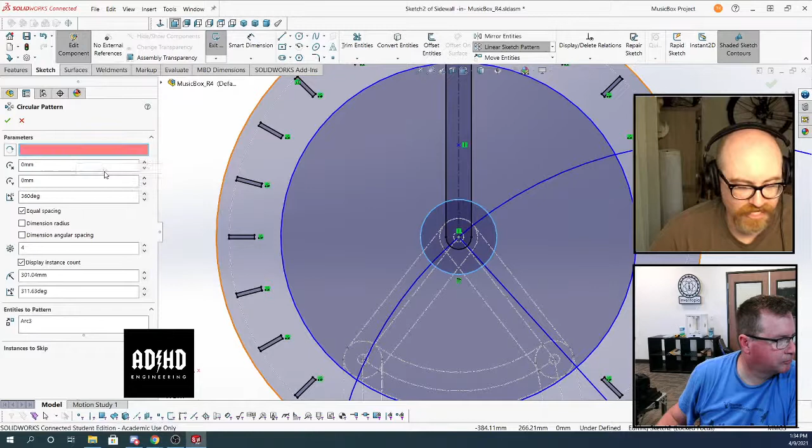And again, there are situations where if you're making a bookshelf, you don't have to think about this stuff. Just make your bookshelf, have a bunch of contours and call it a day. But you're talking about a lot of interdependent mechanical things with a lot of different features that overlap.

For me, this is actually a perfect example of how not to do it. But I thought I was being efficient and keeping my timeline clean, making sure that if I wanted to change one thing, one feature would always depend on the other. So if I changed one diameter, let's say if I wanted to change the number of spokes or the inner diameter hole, I would have the ability to edit all those things together.

Well, you can, first of all, with global variables, but second with just doing it in the proper order.

What the hell is happening to me here? I'm trying to make this slot patterned around this thing.

We can't see anything because you're not streaming anything. Oh, I'm not streaming in Discord anymore. I'm back on YouTube.

Well, there's a crazy latency in YouTube. Yeah, I won't see what you're doing.

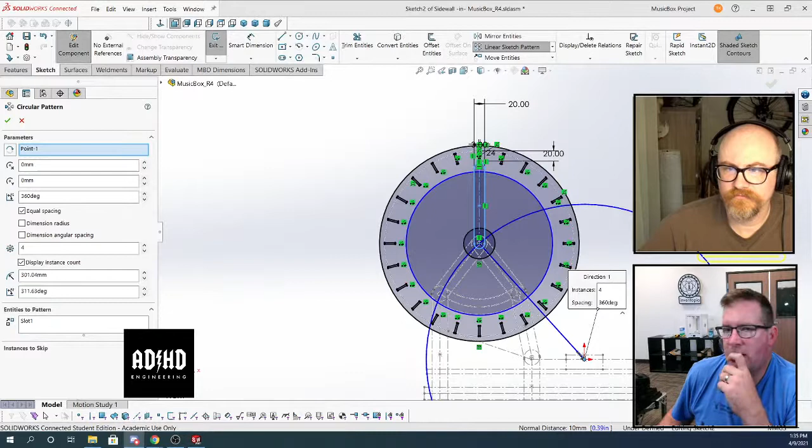Sometimes it works, sometimes it doesn't. I don't know why. But I cannot get it to center this where I want it, when I click on the center point.

So first of all, you definitely want to select your feature first, the entity you want to pattern. Don't go to parameters because that is actually backwards, it should not be at the top. So it defaults to revolving it around the origin.

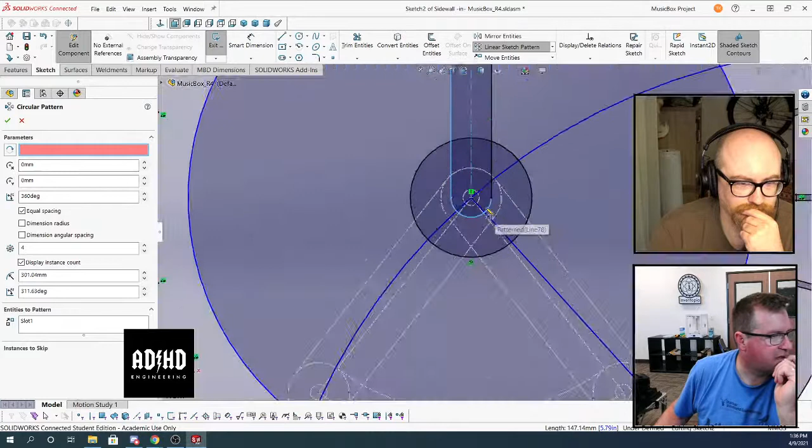Right? Now if I want to change that, I delete the origin as the point, and it doesn't do it. If I select that circle edge, it goes back to... look below it, you think you are...

He was saying that it's intersecting geometry, but the other part... No, you didn't rotate the feature. Like I learned it in uni, you make the feature and then you make a pattern out of the feature, not in the sketch.

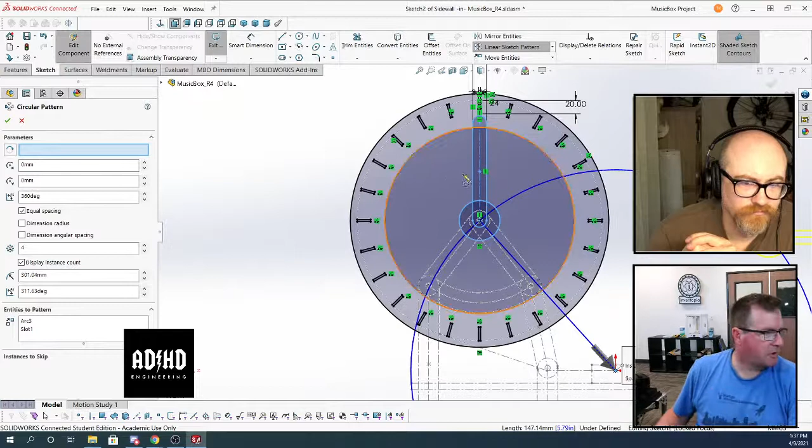Yes, you can do that. But if you have intersecting geometry, I think it makes problems.

All right, you bastards, I'm going to do it your way. Wait, I wasn't even... you have a good eye because I wasn't even watching. He was absolutely right, you were patterning a sketch entity, not a feature, which is interesting.

I was trying to pattern the slot. The sketch, yeah.

So all right, we have this. We have the side plane. Now we're going to put a new sketch on that guy.

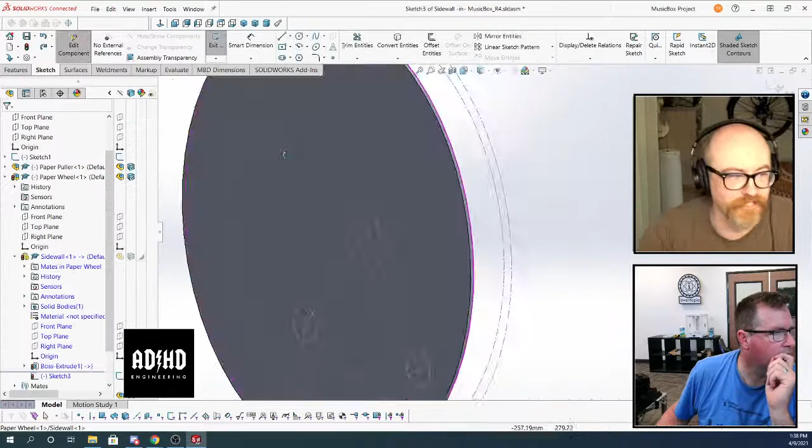We're going to convert. Oh, so your heart was in the right place. I get it. You were going to pattern slot as a cut feature instead of the sketch extrude. I actually agree with that, and I appreciate you were actually following through with what I was saying. But you had already patterned the sketch feature, though. I had already patterned one sketch feature. I was trying to pattern another sketch feature, and it worked the first time, and I don't know why it didn't work the second time.

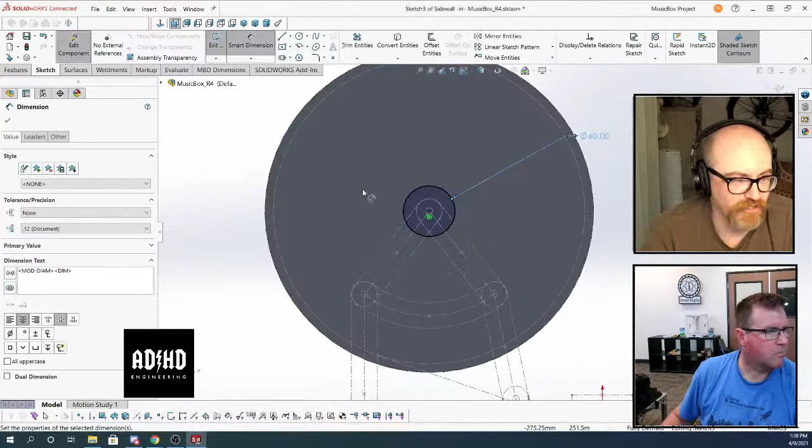Yeah, I don't know what the heck happened there. By the way, Mate, to his point, that's kind of what I meant for him. Like when he's talking about extruding all of those squares, it's for the same reason that you don't want to extrude a gear, by patterning the tooth all the way around and then extruding what's left as a contour. It's better to cut one tooth and pattern that all the way around. That way there's just less information to process. And so that's kind of the point I was trying to make.

No, for sure. Actually, to be honest, that specific example you were talking about earlier, I agree. I do think that anything that is patterned around a circle many, many times should probably just be a feature, especially from how you can change it in the future. If you pattern a sketch object, then say you want to make it a triangle instead of a rectangle, now you've got to redo the whole thing. Whereas if you patterned an extrude, you just have to change the extrude profile, and you're good.

Right. You know what? So I can't get away from this because actually I'm trying to define. I'm drawing this based on the spoke, not the cut, right?

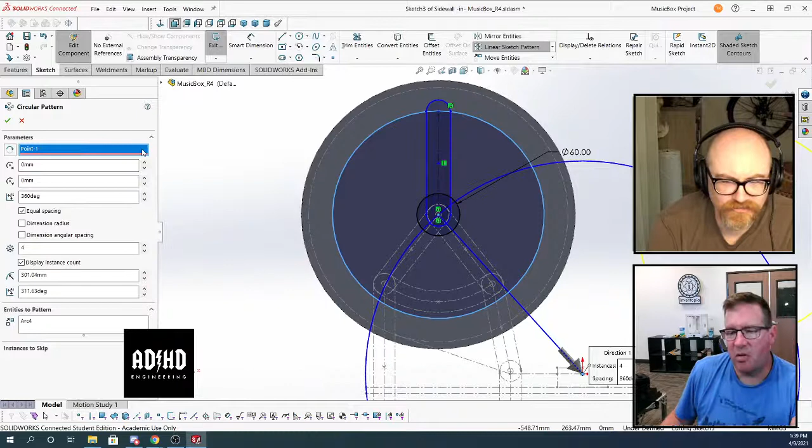So if I wanted to make a 5-spoke thing, what are you exactly doing? Just trying to make the spokes on the wheel. Okay, right? And I was going to define it based on this slot entity, right? So that's one of the spokes, and I was going to pattern that around.

I can't make a cut here and then pattern that cut. I would actually have to draw the other part of the hole that I'm trying to cut, which is a little weird. Oh, so that's how I would do it. You draw the cut out and then pattern that. Yeah, it's just not the way I'm thinking.

Equal slots. I love the equal slots constraint. Yeah, I mean, I like it too.

All right, and this is going to be 360 divided by 5, which is 72. Features. Now, I couldn't do all the individual cuts that are going to be for the cross braces because there's a different number of those than there are of everything else.

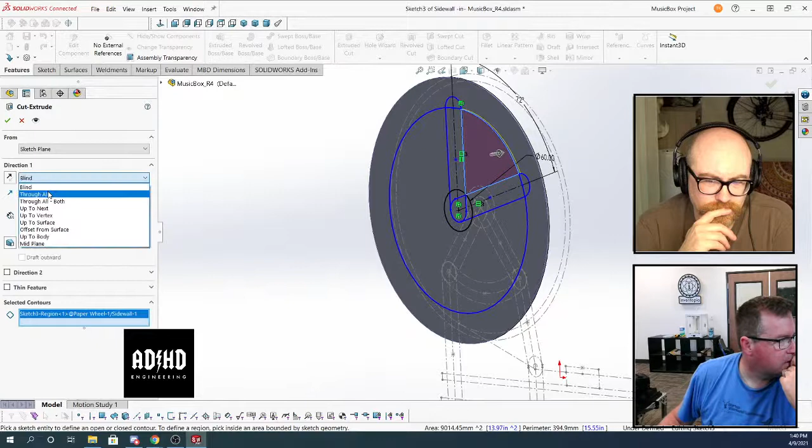Roll. Huh. All right, so now you're going to have me. Where the hell is that now? It's under linear pattern, you just do the down caret. Direction. Yeah, don't stop, back up. Don't do the direction first. Pick the feature. Oh wait, no, you did, you got the feature picked. No, so never mind, you're good. Sorry, you want to do the feature first if it doesn't populate it, but you did, so don't worry about it.

72. Wait, what? You want to go around 360 degrees, don't you? Yeah, so you leave that at 360, and then you just put the number of instances. There we go, there you go.

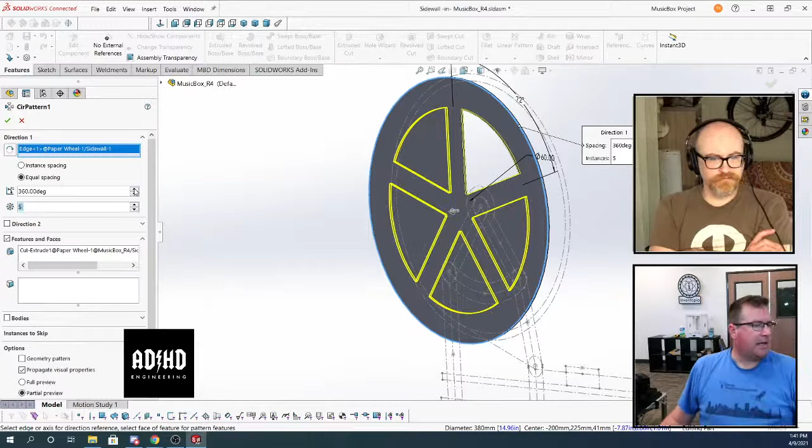Yikes, I don't know, guys. That's harder, that's harder. I mean, how is it? I don't know, I just like doing everything in one sketch because then I only have to edit that one sketch, it just seems like.

By the way, this whole feature, this flyout thing, I miss this in Fusion right now, where you can automatically grab all of those fillets. Well, so if you go to FilletXpert, it's even more powerful. But I mean, this does work too.

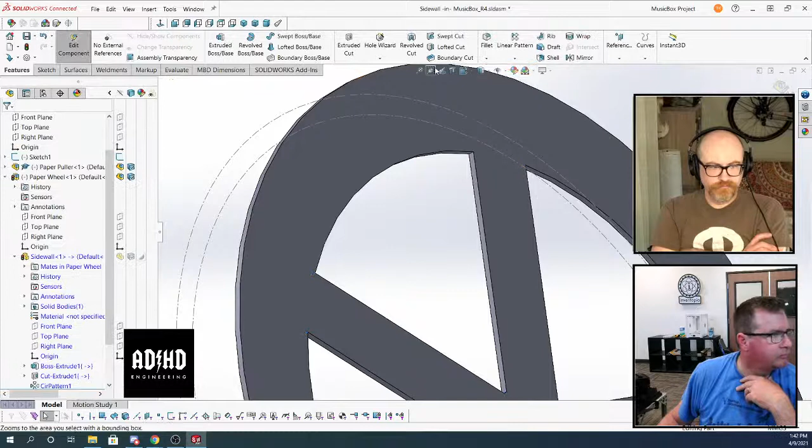It's not letting me do it. Okay, you see how there's a fillet under the command? There's FilletXpert. That should... I would say there should be a selection for all concave.

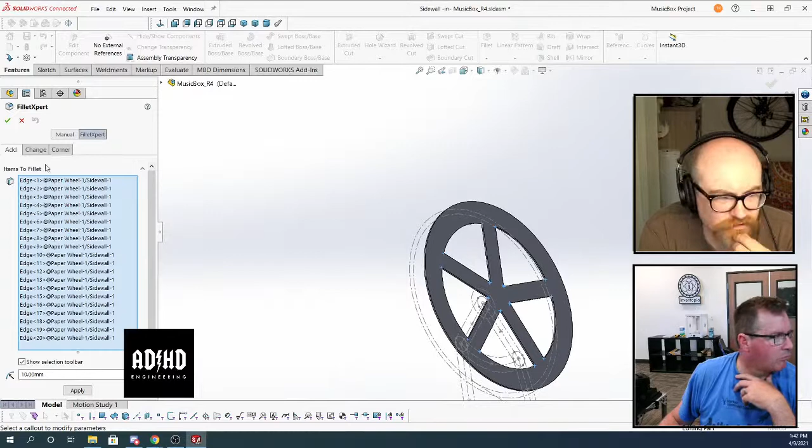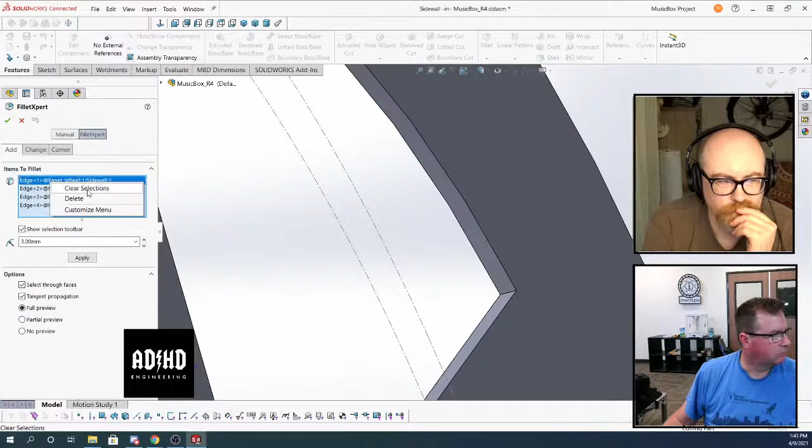I think the problem with it not doing 10 millimeter radii is that it would self-intersect. Oh, the fillet was too big. The thickness of the part is probably less than 10 millimeters, or less than double the radii, so that creates self-intersecting geometry which it can't calculate.

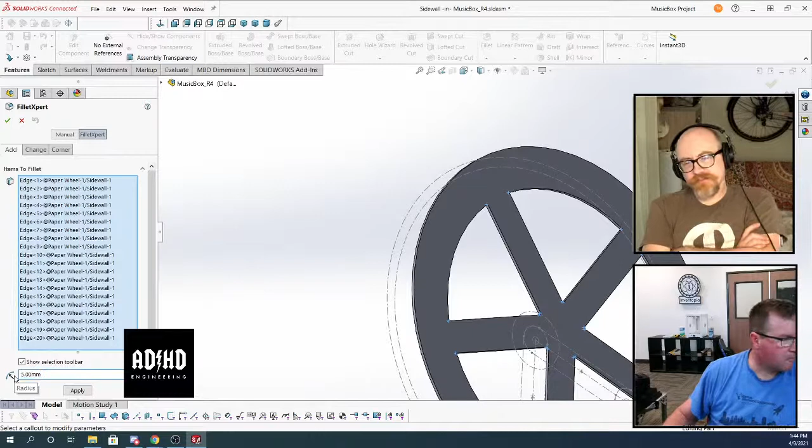So it won't allow you to do 3 because your corner, you made some... If you really want to know the real reason why this won't work, look at the corner on the inside by the hub. You'll see you actually have two edges there, not just one. So you have to make your feature look different than that before you try to fillet it.

Which is another, so something like that.

Am I still editing this part? No, I'm not.

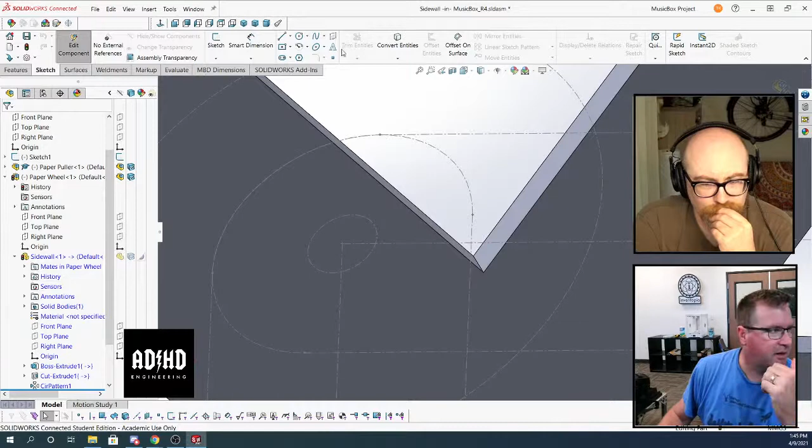This is a cool thing I love about SolidWorks: in Fusion you could do that edit and get timeline instances that end up in a different part. If you don't select the active part, you can do sketches in a different part, a different body, and they're not related. You could put a sketch for one part in a different part.

Right, let's do 12 or 15. That looks better.

All right, now I'm going to do another sketch because you guys want me to do it this way. You bastards.

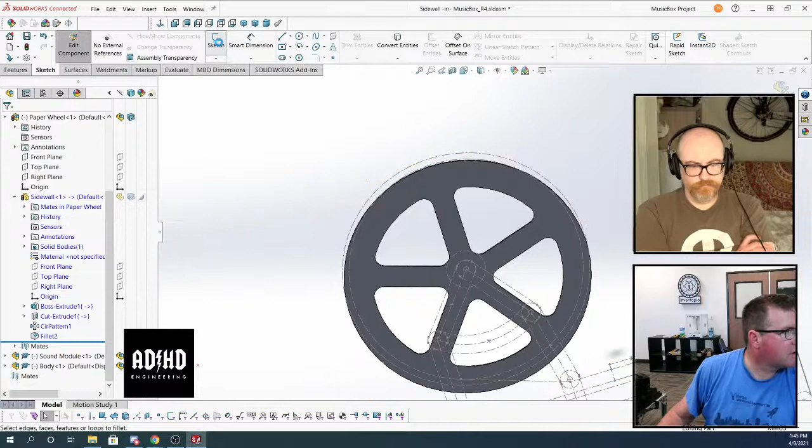And I'm going to... 3.1 millimeters. This is going to be plywood going across. And we'll do 20 millimeters there.

Is there a reason you have a construction line there? It's just to keep the center of it vertical to this thing.

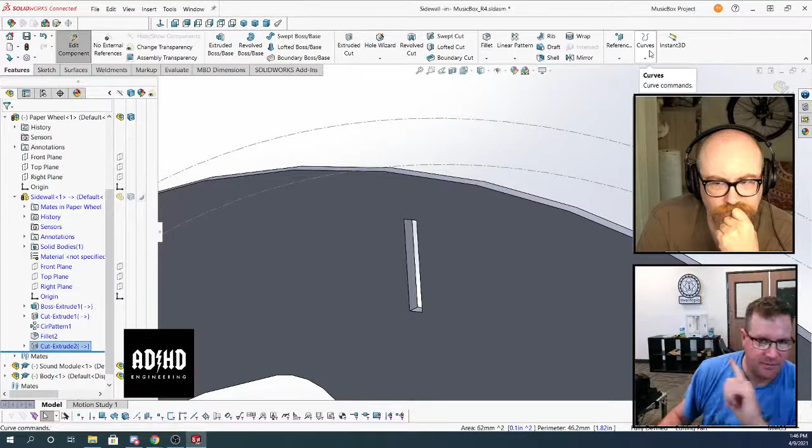I'll draw a construction line up here and then do a center point rectangle up here. You could just make the center point of the rectangle vertical to the center point of the circle. Yes, I could, but you made me make an entirely different sketch just for this feature, so it's not getting overly complicated now, is it?

I'm going to do 24 of those.

See how easy that was? Yeah, but look at my timeline, man. I could have had one sketch, albeit a busy one, and one extrude, with all these patterns hidden in that original sketch. I'm doing it this way because that's how you told me to do it. I'm not saying I like it.

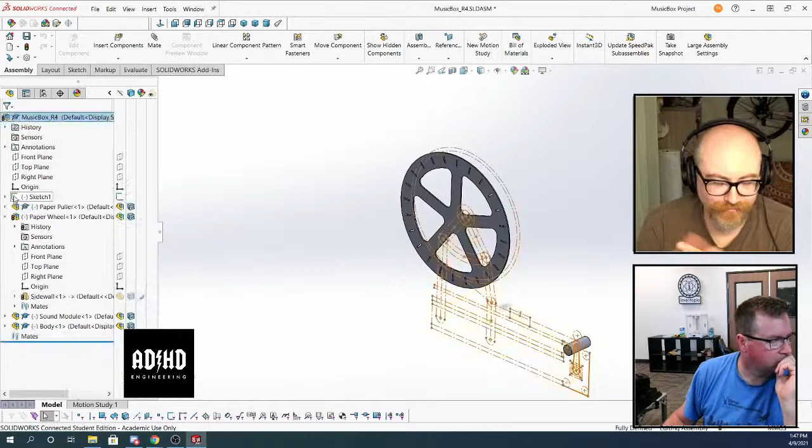I get it, the folklore of Fusion says that's what you should do, but that just does not apply to real modeling, especially in SolidWorks. That's just not how things are done.

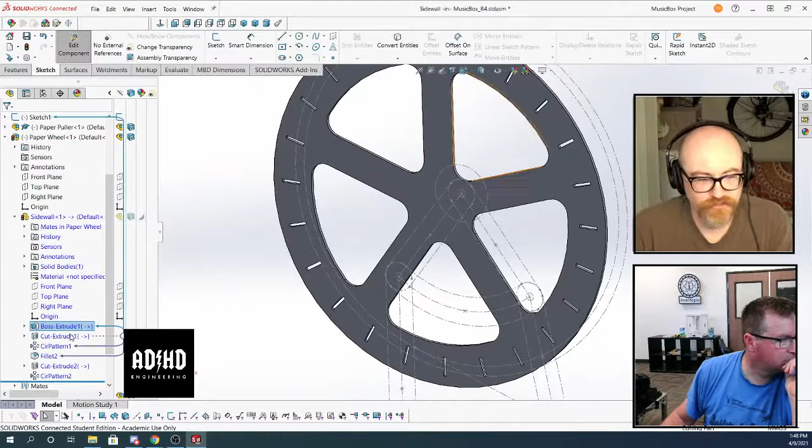You want all of those things to be separately editable. And the neat thing is, if you select that solid, it should display all of the things about it - for example, you can tell SolidWorks when you select a solid to display its dimensions, how many things there are in a pattern, etc. That way you can change it without even going into the part - just select it and change the number that appears on the screen. It's kind of neat.

Alan, I'll be done at 2:30. Okay, thanks. Someone, to be polite and not interrupt my live stream, was standing right next to me and texted me instead. Thank you, Alan.

Hey Alan, as a punishment, come here. Sure, you have to be punished. No problem. All right, this is Alan Perlstein.

Hi everyone, tell him what you do. We are reinventing cocoa by growing it from cells. Cocoa is unsustainable - there's slavery involved, and a whole bunch of little kids growing about 60% of the world's cocoa. So we have a better way to grow it, better and healthier for you and the world. Love to share California Cultured, please reach out. Thank you, sir.

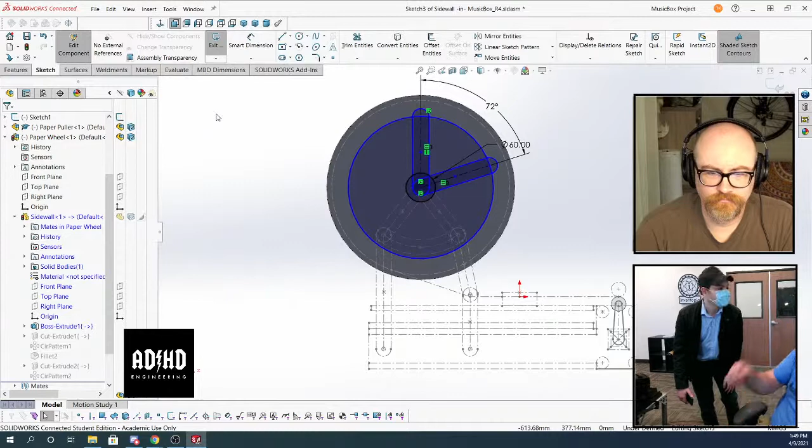All right, that's my standard punishment for someone. No problem, anytime, you got to do your elevator pitch. So yeah, just like Impossible Burger created burger in a test tube, they're doing chocolate in a test tube, which is good because it's not meat - it's plants growing it anyway. A lot of the world's cocoa is made using slave child labor, so he's helping solve that. Those are the kind of people I spend most of my week with.

So his punishment was publicity? His punishment was publicity? It's not that much of a punishment.

I know, blue lines. Okay, I need to do this cut extrude.

Yeah, I would trim the hell out of that sketch personally. I'm this close to cutting you off, David. Just this close.

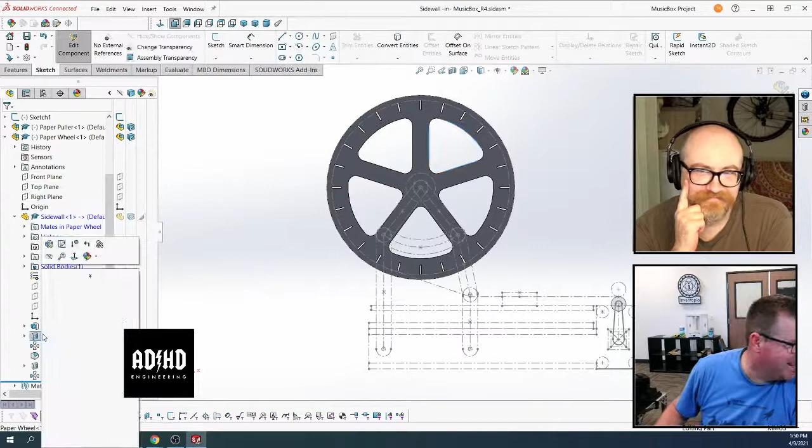I'm still trying to figure out how to get this part to not... oh, I'm gonna do this here. I'm gonna cut this too. I would too, cut the hell out of that.

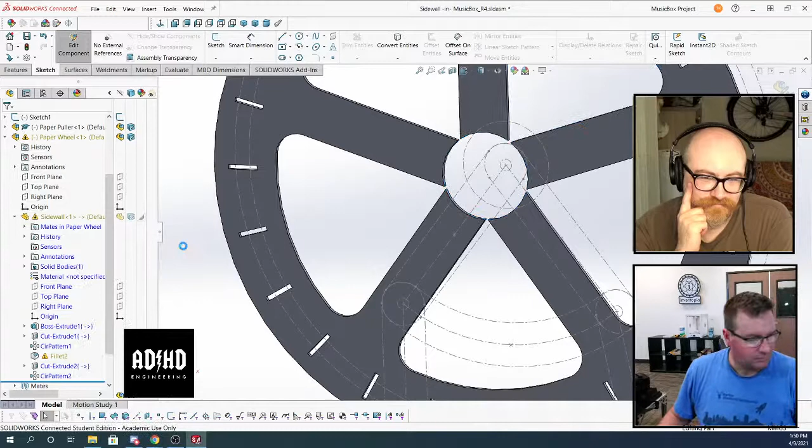Like at uni we learned, yes, you have that cut feature, and that's how I learned to cut in the context of learning. You create all of these solids, and then you can more easily see what you could do if you would try to manufacture that part. You would say, like, I have that piece, I bring it to that geometry, then I cut something here, and in that way it's easier to wrap your head around, compared to having one big sketch which tells you everything.

Right, yeah, that's a good way of putting it, man. Thank you for the input. I agree. And that's kind of... I don't, but thank you for the input anyway.

I like my one sketch parts, man. Well, I don't. Yeah, all right, so again, I'm doing it your way, you bastards.

That said, all of this was built up, so now I have in this file, because I want to see what it's like, this exercise is for the sake of playing with the bookmarks and the labeling conventions and making it right. So I'm going to hit File, Save with Options, and hopefully I'll be able to save multiple parts across multiple assemblies, all with different bookmarks, and it's not going to be a pain in the butt.

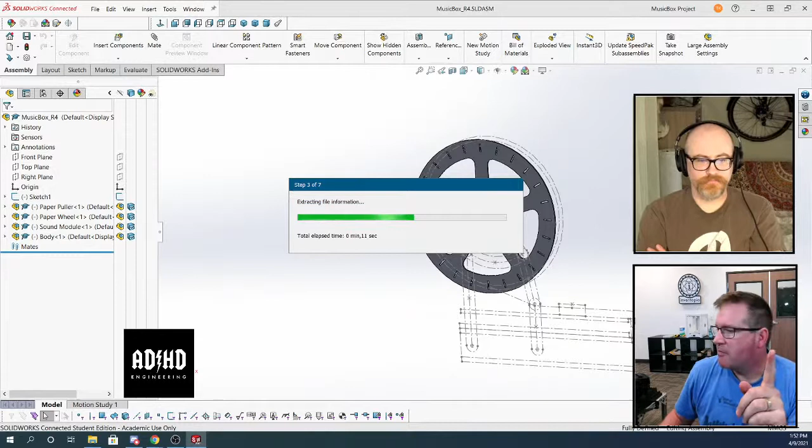We don't know that it's not going to be a pain in the butt. Yeah, what Nicholas is saying in the chat.

I don't know, I like doing it in the slots. What? Yeah, he's saying if you modify the number of slots, it's harder if you only have one sketch. I don't think it's hard, even. You just go into the sketch and you edit the pattern in that sketch.

But yeah, I don't even see a chat in YouTube. There's no... But you need to find the pattern in the sketch, and if you make your sketch needlessly complicated, it is hard to find it. Exactly, that's the point probably that he tries to make.

Of course I can find everything, but do I really take shorter time if I try to find it, or just know where it is? If you look at the part and you don't know it, you have to look at the sketch to try to see where's the pattern, if you do it all in one sketch.

I mean, so that is absolutely a good enough reason, right, to do features in patterns outside of a single sketch. I agree. But it seems like the real problem here is the culture around the Fusion project, Tim is showing it here, is about trying to cram as much as possible in one sketch as the objective, right? And were we doing that to keep the feature tree compact and make it editable and navigable, or were we doing it that way because of the weirdness of Fusion and the way it stacks stuff, and because the timeline is sometimes not that reliable?

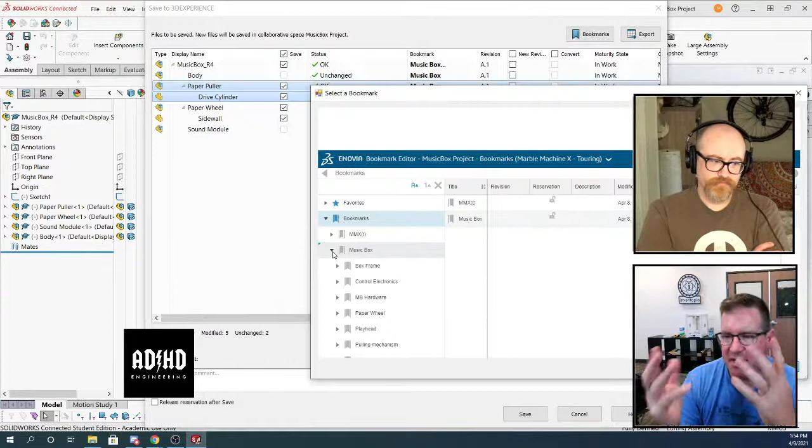Again, there's a lot of folklore around Fusion 360 and how it works. And it has unfortunately driven a lot of very poor decision making to try to work around those misunderstandings about how Fusion works. A single sketch with a feature, then another sketch with a cut, and a pattern, is as low or lower of a processor load than having one sketch with 800 sketch profiles that you have to individually click to get the right extrude. It's sort of like you're trying to fix something that wasn't a problem to begin with, right?

Well, by making it harder. I mean, I do know that if you're going to go back and change like the rectangle that I just patterned around to a circle, you would really be deleting the pattern and then remaking it, rather than just editing one instance of it.

I do get that, but if I have to disabuse myself of that notion, we do that, right? But you do admit that for the Fusion project, we've been telling people to put as much information into one sketch as possible. I know that was a problem from the absolute beginning. It should have never been a part of the CAD standards. You're saying not even for Fusion? No. It's even worse for Fusion, actually.

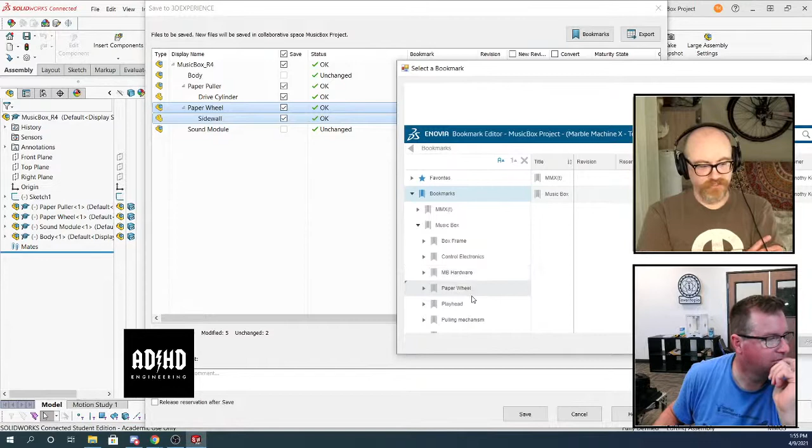If you look at the box frame, I don't know what it looks like now, but the one that I did, there's a single sketch for each of the little weld-on bits, and the sketch is on one of the origin planes, and the extrude was done using an offset in the right place, so that if I need to edit it, I know exactly where it is in which sketch. All of the extrude information and where it is is right there, editable, etc.

And the problem is that I noticed once I left, people were putting planes in wacky places to try to sketch on it. And then once they put a plane in that place, they would do this million contour sketch that included a panacea of sketch contours for 100 different bodies.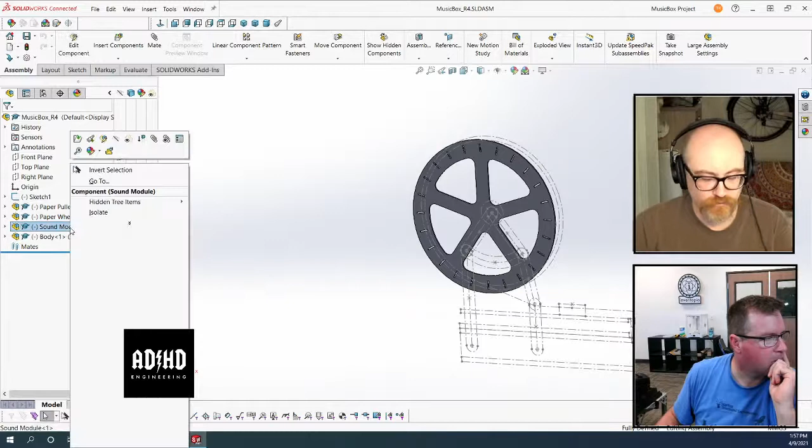And then they think they're cleaning up the timeline by having just one sketch and a plane, but really you're making the process harder on yourself, first of all, because the reason you do this in the first place is because you want it to be a thing. But second, that feature should only have to extrude a sketch. If you have to go in and say, okay, I want this contour, I want that contour, I don't want this contour, then you've totally missed the point of the extrude feature to begin with.

Right, because if you have this sketch profile with like 50 holes in it, you're like, okay, I don't want this hole, I do want that hole. Again, what you really want to do is extrude your primitive, like a circle, a square, whatever it is. You extrude that, then you sketch a location, then you go in and say, okay, how many 5mm holes are there? There's like 50 of them, and they're all in weird places. So in that sketch, or maybe a second sketch, you can put points where those holes are located, and then you can use the hole feature.

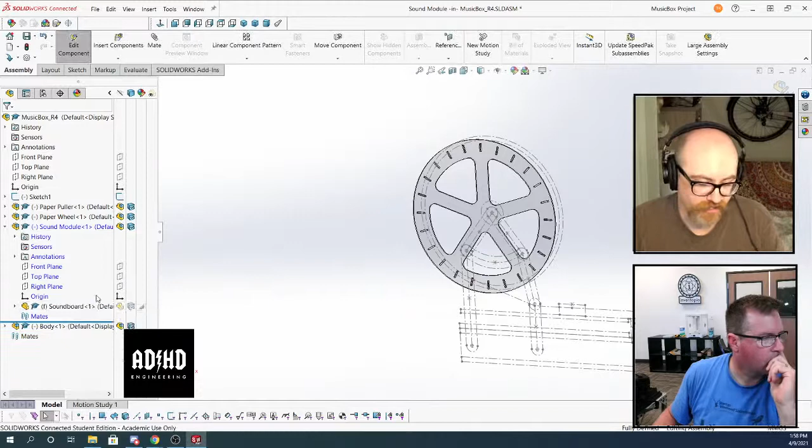And now you've got a primitive extrude with a hole feature. And if those holes are in a circular pattern or a square pattern or whatever, now you can say, okay, the first one, the seed, is going to be at a location I've determined. I know what the pattern is. So that sketch, all it needs is a location for the first hole. And then you just pop a hole there, and pattern the hole. Now you've got 3 features and maybe 1 or 2 sketches.

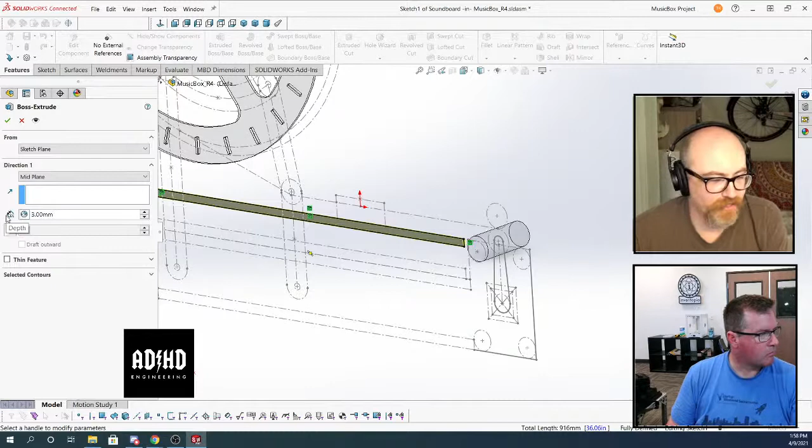Right, but what you have is a recordable set of instructions to the computer, and frankly, even more so to the next person that has to work on it, because they know your design intent. That's an even bigger deal, because now you've got a thing that says, okay, it's a circle, it has a bunch of slots, and those slots are patterned in such a way, and it's instantly something you can tell by looking at the feature tree or the timeline. So having one sketch with 1,000 sketch contours that you then have to spend half an hour selecting is just bad practice. It's not how the real world would work.

I am seeing in the comment here, so Amos—who's, do you know who Amos is? Of course I do. In fact, I just—so he says best practice is simple sketches, and I trust him, so I'm just going to go there. Not to say I don't trust you, David. I'm just saying he does this for a living.

That's kind of, I don't know.

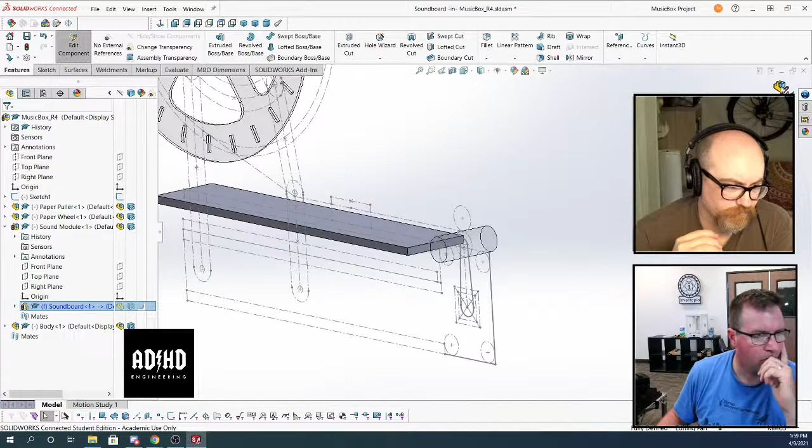I do have a counterpoint, and this will be an interesting example, David, because one of the best examples as to why you might want to put everything in one sketch is what you did, Ben, with the triggers. I'm actually curious, when you made that in SolidWorks, how did you make it? It wasn't just one sketch, right? It was, well, yeah, but that thing is a single piece of steel with like 12 holes in it.

Yeah, but all those holes are, first of all, unique. They're not patterned, that's not a patterned sketch. They depend on, what do you call it, they not only contribute to the overall shape of the thing, but they also depend on the shape of the thing. So they're not features in the same way that spokes of a wheel or slots patterned around a circle are.

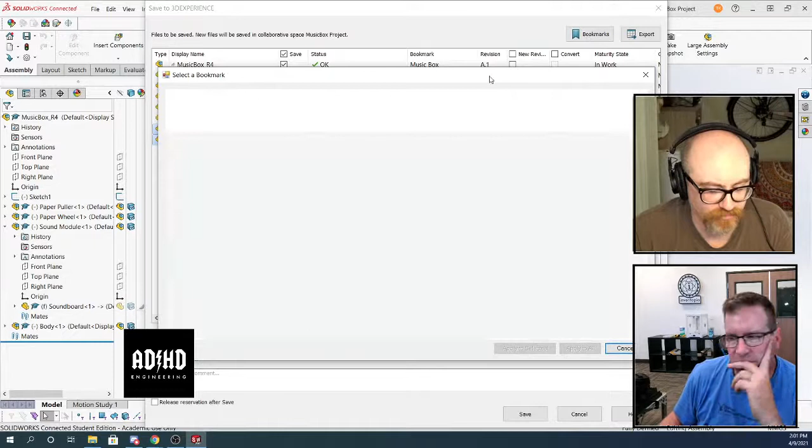I think I get what you're trying to get at, and in a way you're counterpointing using my own example. But on the other hand, it's the best example I could think of, honestly. Yeah, I get it, none of those holes are patterned and they're all unique, so it doesn't really apply to that particular example, unfortunately. Right, well, okay, so that brings me to the next point.

By the way, Amos is in the Discord room. If you have opinions, feel free to unmute yourself and speak up, man, we can use your expertise. You don't have to, if you're currently in a sawmill and can't speak without noise, I understand. Invitation. Yep.

One of the things I noticed working on the MMX is that there are plenty of things that are repeated or should be patterned, and I agree with you there. But there's also a million things that aren't. In those cases, I think it's better to put them all in one sketch. There are so many examples of parts on the MMX where they're all in one sketch, and the sketch is better for it, even though they are holes, because so many things on the MMX aren't patterns and shouldn't be.

Can you give me an example? I'd say the entirety of the side frame. I can't imagine anything that should be repeated on that, and it's got a ton of holes and different things in it, but nothing there should be patterned. You could put everything in one sketch, which is what Andre did, and it works really well.

Wait, the entirety of the side frame, what do you mean? Right, I'm not going insane here. Yeah, the side frame for, hey—

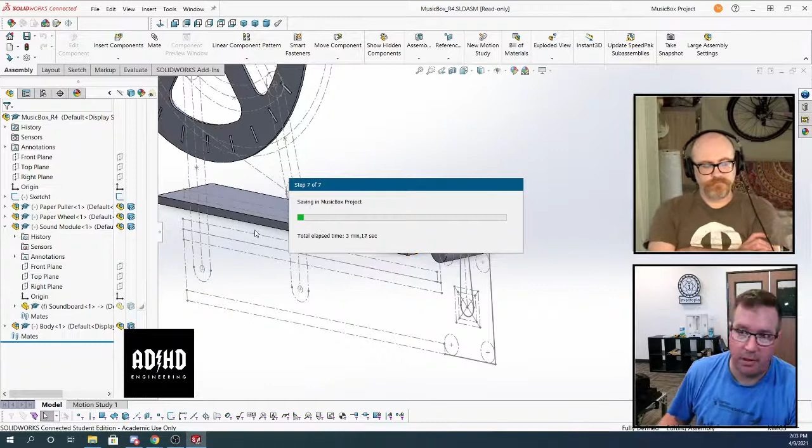Cool, so I now have 3 subassemblies. Well, I made 4 subassemblies, but I've made 3 different parts. We're editing everything together, and as long as you drill down in this side thing and edit your parts, I think you don't break it.

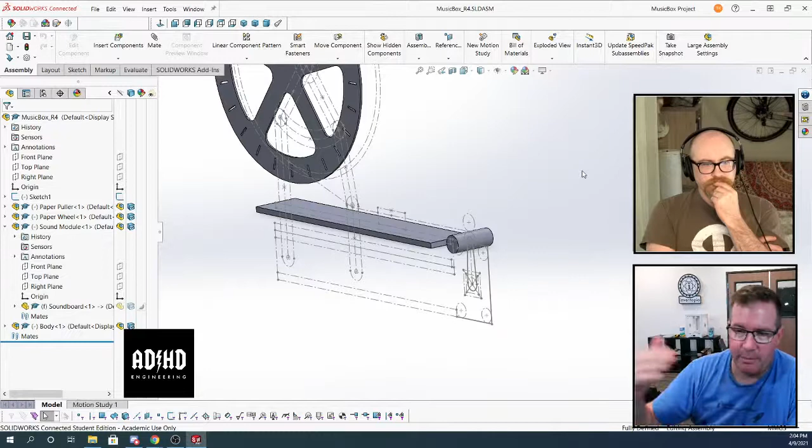So I'm doing a very similar thing in a Fusion project right now, and it's a pain in the butt because in Fusion you can only edit in place one tier down. So if you have subassemblies, you have to open up the subassembly and then edit in place, or go somewhere else and then update. It's a real pain in the butt when you have subassemblies to edit in Fusion.

So back to what Mate was saying, you can just say Matt. It'll be better. Matt. Mate. Okay, yeah, it's actually just Mate. I've never... is it like it's not Matthew?

It's based on the tragic story of how I accidentally misspelled my name when getting it engraved on a ring because I was too tired. When I went in to be like, 'Hey, you spelled my name wrong,' they were like, 'No, that's what you put in the form.' So now I keep it. I have a good friend who misspelled his name in my fraternity - he didn't have the N fully closed when he wrote it down, so instead of Logan it was Logar, and it ended up on our chapter composite as Logar, and he's been Logar ever since - that was like 20 years ago. So it's exactly that for me.

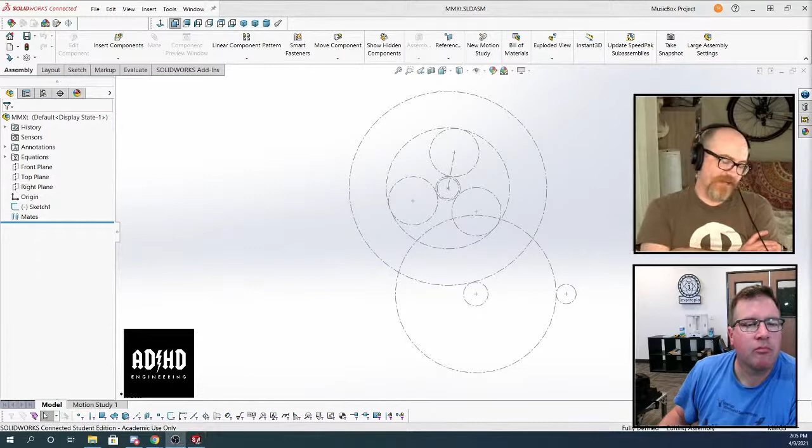All right, okay, well, so Matt, I actually disagree about the side frames. I think the side frames - there's a reason that the skeleton has the outline of them - and you should use a combination of offsets and trimming so that there's a single sketch profile for each one of those.

I actually think that the side frames is a good example of bad modeling. Really? Wow, that's so we're just in direct, I guess, not opposition - we're just directly disagreeing then.

I think that was a good example of why it's valuable, because you can see everything in one view, and at least for me, I'm a very visual person. I can navigate that super easily and click on what I want to change, hit enter, call it a day. If you look at the entire skeleton as a whole, that's the danger of making a whole bunch of sketches - you need a specific sketch to change, say you don't know what it's called because you didn't make it, and if it's a complicated part with 40 sketches, all with different names that you can't see all at once, you've got to click through them all to find it. That's much more of a pain than having one sketch with all of them where you just go, there's the one I want to change - it's right there in front of me.

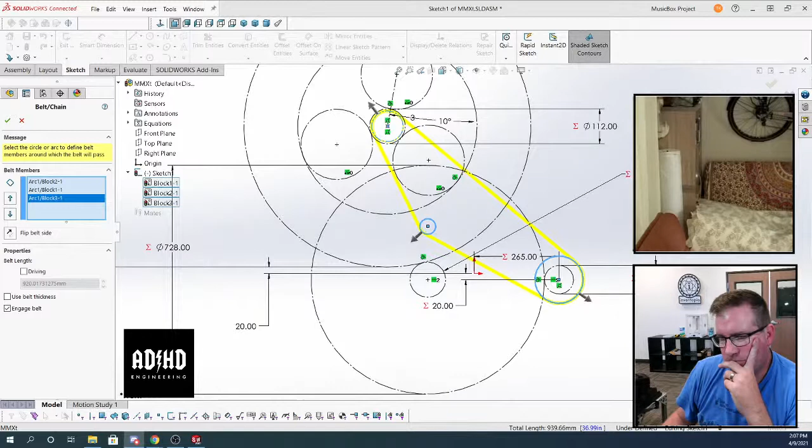So one thing to consider is that if you have Instant 3D turned on and you have smaller sketches for each feature - sorry, I thought somebody knocked on my door - those sketches will highlight individually instead of one big massive sketch.

Hey Amos, how's it going? Good, how are you guys? Good, thanks. My first time jumping in. Great, you're welcome, I'm trying every time, my friend. I'm trying to impress upon these gentlemen, and they're fighting back.

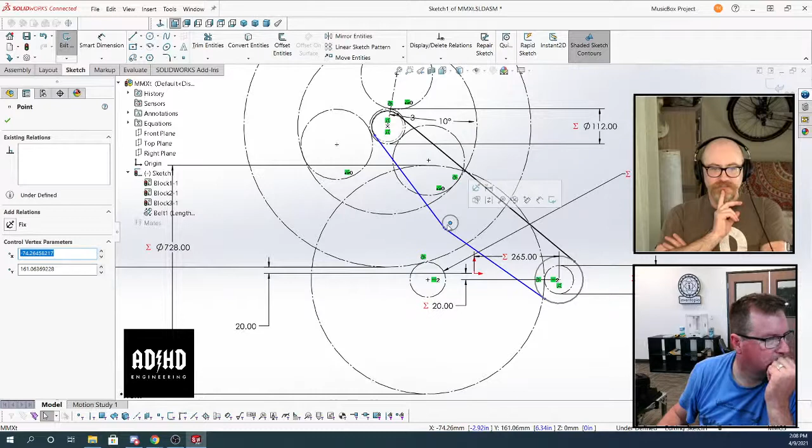Here's the cool thing about design intent - for example, Tim is trying to put an idler pulley on the tension side. That is the wrong side to put the pulley on. Oh yeah, really? That's just what it defaulted to.

Can I edit the belt? I can. Well, you'll have to move that pulley so it's on the other side, like the center line, and then it should pick it up properly. I think you probably just have to get out of the belt or delete the belt - yeah, you just have to delete the belt because it's automatically going to do that.

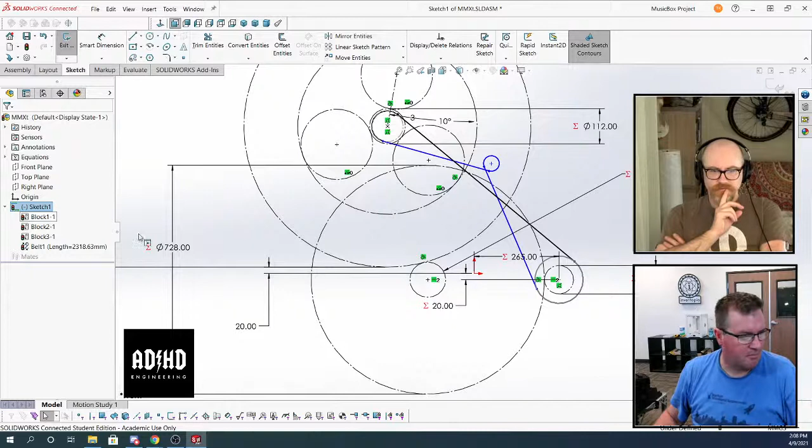Got it - in fact, I don't think you had to make that extreme. Wait, what happened to your idler pulley? Where'd it go? I don't know. I think it's on the bottom right now. Yeah, it's way over - oh, there, yeah, it moved. Move it back to where it was when you started. That's good, we're good, yeah.

How do you know that's the drive side? Oh, because it is, you just knew that. Tim, I've been staring at this machine in SolidWorks for probably more time than I was in the Army. Second only to Martin, probably.

Yeah, okay, so you want to go back and reverse things because it's on the wrong side. Oh, reverse that one pulley. Yeah, because you want it pushing from the outside of the belt, not from the inside, right? So you just have to reverse that pulley.

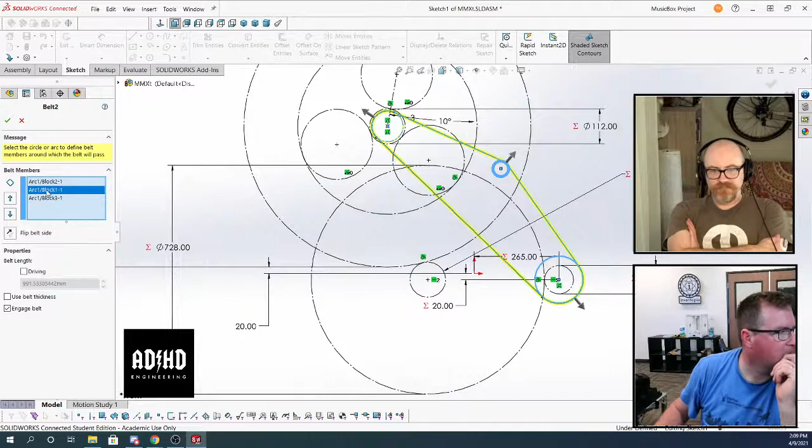Well, but you have more design options this way. Do you? I don't know. Hey, look, this doesn't work in physics. Yeah, because you had it out of position. Yeah, it's correct now though. You had it in this extreme position off into space, which is why it wrapped the belt around itself.

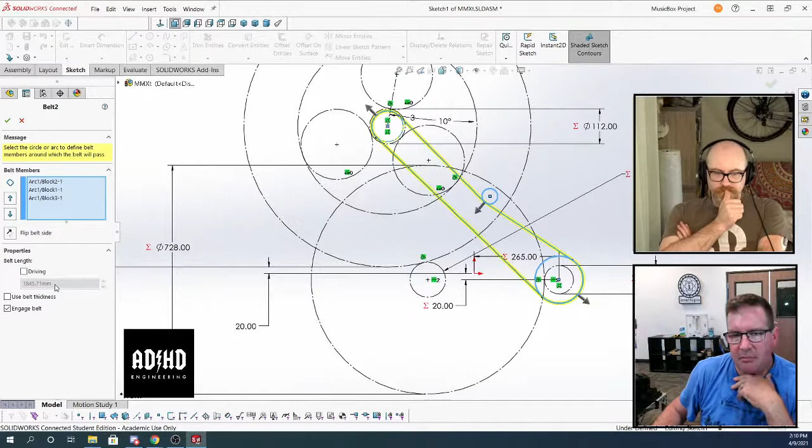But now it's back in the right position. So there's going to be some sort of thing based on the length of belt that's available. We'll be able to say there's some distance here, and then we'll change this belt. Once we know what belt we want, we'll have it driving, and we'll give it a distance, right? So somewhere along the line, you have where the pivot is for the arm that's going to hold that idler, and you'll want to constrain the idler block itself on an arc. Right, it has a center point where you know that pivot's going to be. Right now you can't fully define it unless you give it a polar distance from one of the other pulleys or something.

So let's actually back up, because I know there's people here that weren't here when we were talking about this last week, which is that we were trying to define the offset. I'll back up even further. We were trying to make the most logical parametric layout for the machine, completely, right? And we were trying to figure out what this distance is, the vertical offset between the center of the programming wheel and the drive shaft.

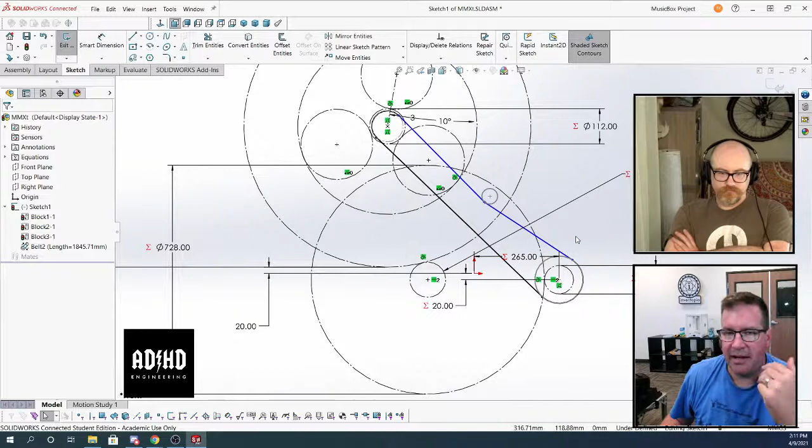And David had wanted to do it based on the length of belts that are available. And my idea was that if we have a tensioner pulley, then we have more design flexibility. I just thought it was weird that we would have such a major location for this machine driven off of the lengths of belts that are available. I didn't like that. So what we ended up doing was driving this constraint around actually a clearance for the teeth going over the top of the frame.

So this origin here, we've decided the origin for the machine is the center point of the top of the base frame. So that's kind of our first locus, and we're dimensioning everything from there. Is that safe to say? Anyway, yeah, I think that is.

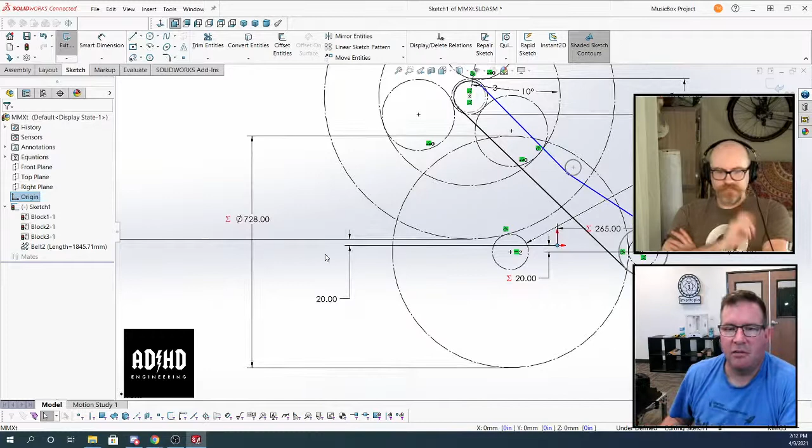I was failing to realize you had to have each of the different elements of the pulley be different blocks. I put them into one block, and we weren't getting the pulley function to work last week, and that's kind of where we ended up. So now we have this, and we can figure out some other way to constrain where this pulley is. We'll have to kind of get there from something.

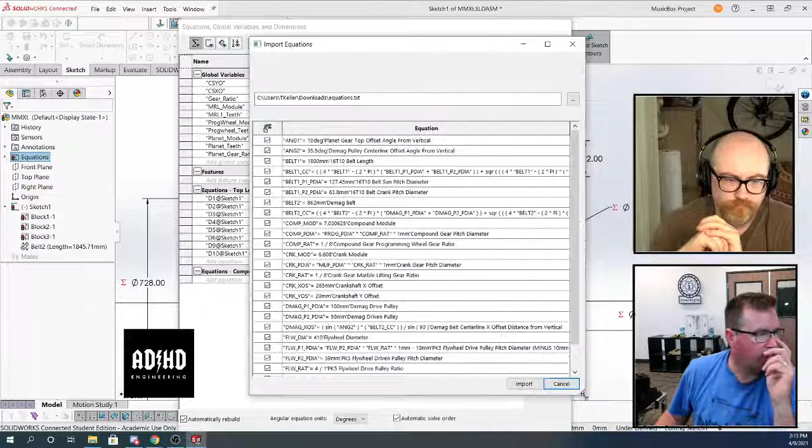But while we're doing this, let's get— I have all of these, these are the global variables I've put in. David sent me the equations he's been using, and because it's SolidWorks and it's awesome, we can select what we want. I can take all of his parameters and import them all into this thing. Some of them are going to be broken, which is fine.

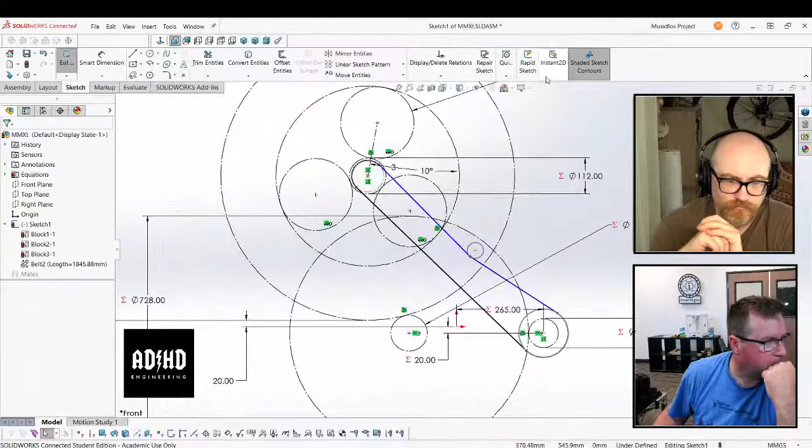We're not going to clean this up on this stream. Okay, they're not actually broken in real life because they hadn't been—if you notice, they're fine now. Oh, are they? Equations would show red if it wasn't going to work. Oh, boom, see, they're good.

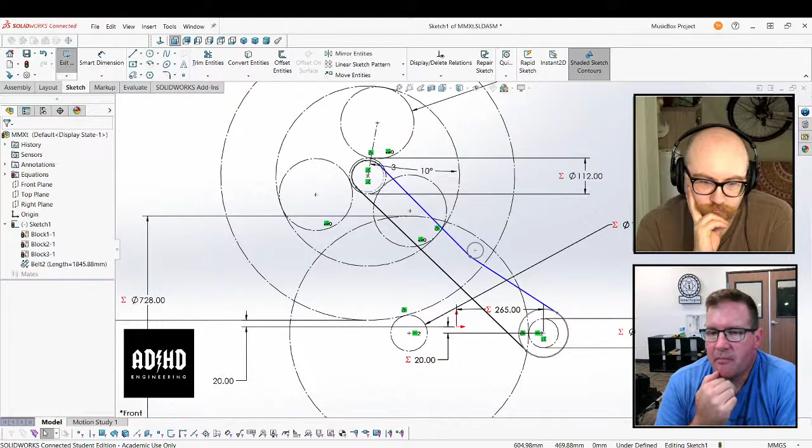So let's make a couple more decisions based on this sketch. David, I asked you last week, what are the next things we're trying to define here? If we were recreating the original or existing MMX, we'd want to put the flywheel in there and also the belt that controls the demag.

Okay, and there's a belt on the flywheel as well, right? Yes, there is, and you're going to have to make a couple of super blocks, because remember that crank is going to actuate not only the belt that goes to the sun gear, but also to the flywheel. So the demag wheel is driven off of this one up here? Yeah.

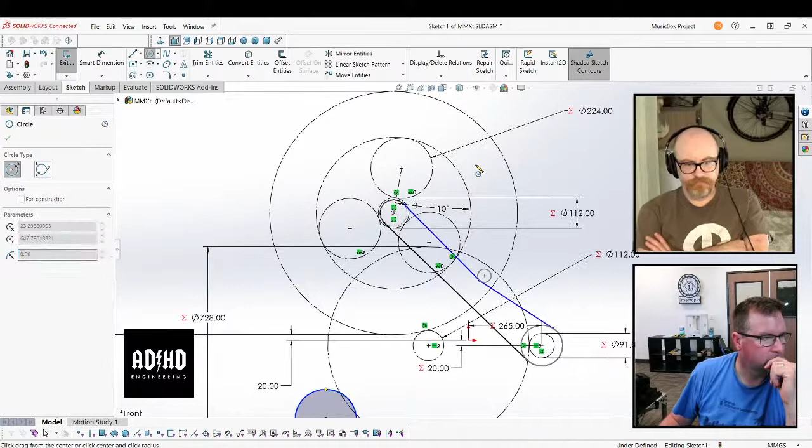Would you not include the motor as well and the motor pulley? Oh yeah, I didn't even think about that, but yeah, on top of that, add on the motor pulley. That's another one.

Well, actually, this one's a little harder. There's also the vibraphone and vibraphone pulley, but those aren't in this plane. Those are different because they don't figure into what this sketch is. Just because it's a belt doesn't necessarily mean it belongs here. That belt doesn't control the position of the vibraphone, it just sort of connects them, but it's flexible, actually not planar. Both of the things aren't together—it requires a circular belt.

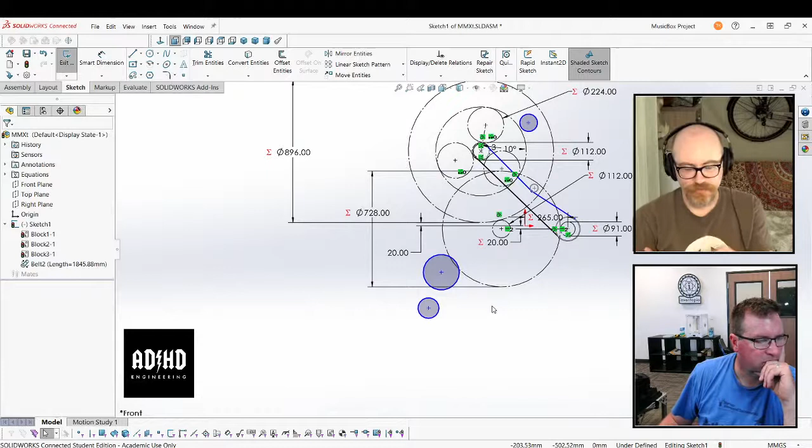So it doesn't control anything, so because it doesn't control anything, it doesn't belong here. This layout sketch is specifically to locate things later on in dependent entities. So in terms of the flywheel, that counts, the demag, that counts, the frame, that counts too, but I think the frame can come later.

All right, so how are we going to constrain the center lines of each of these driven things? What do you mean? Well, you have a bunch of equations here, a bunch of parameters. I don't know if any of those apply to what we're talking about here. Okay, so you want to locate those things, right? Yeah. Okay, so which one do you want to do first? Let's do the flywheel.

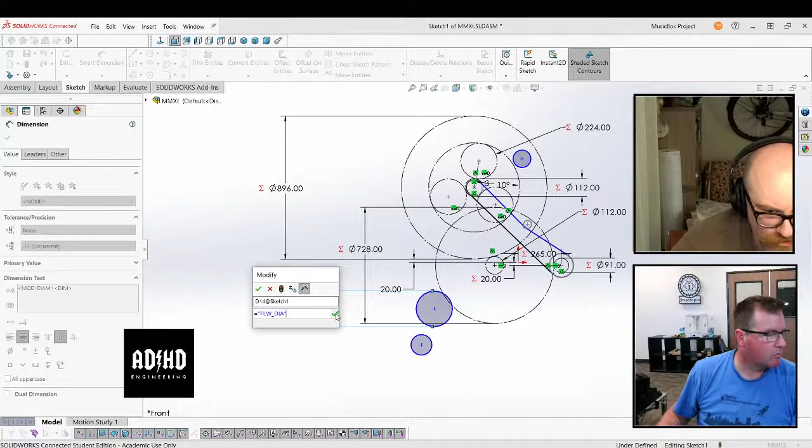Okay, so the flywheel, if you look at the equations that are FLW, those are the flywheel ones. That's FLW, I believe it's diameter. No—are you doing the flywheel itself? Yeah. Okay, so then that is the diameter. Yes.

Okay, all right, so we have P1, P diameter, P2. Oh, pulley 1, so those are- pulley 2. Your abbreviations are understandable, David. Thank you—pitch diameter is what I use for P di. Oh okay, of course you could put anything else. In fact, PD is probably better.

Oh, so there's actually two circles here. Yeah, so that's why I was saying mega blocks. It doesn't matter, you could just make them concentric, but if you want to have traction constraints or relations, then they need to be multiple blocks, but they don't have to be for the purposes of what we're doing here.

So is pulley 1 the driver and pulley 2 the driven? In this case it is, but it will always be the bigger one. Whichever side it's on doesn't matter, it has to be. So on this side, is it the bigger one? It is, yeah.

Are you sure that's the right one? Yeah, the flywheel is significantly larger than the take-up wheel, or the second pulley, by a lot actually. Okay, and that's straight out of Fusion. It's 236.

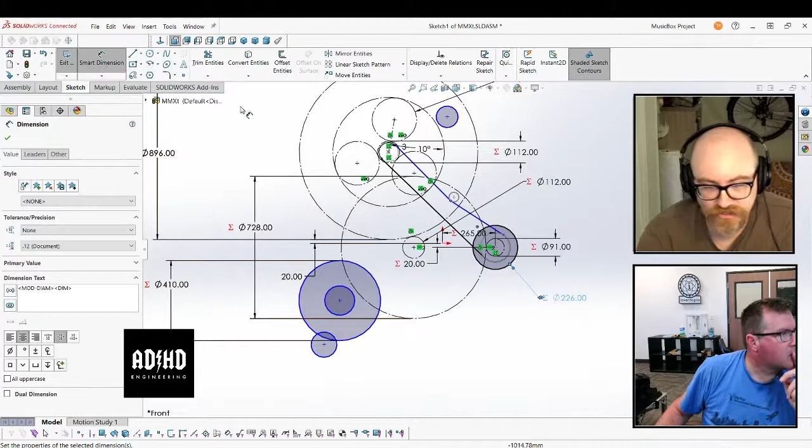Okay, so then this is equal to flywheel pitch 2 diameter. I guess that makes sense—it gives you a mechanical advantage over it. Yeah.

So we have that. All right, now what did you mean by mega block, David? Well, that's just a name I came up with—you can make a block out of blocks. Better than Lego, yeah.

Okay, so now you've got 2 blocks, right? I only have one for that one. Oh, right.

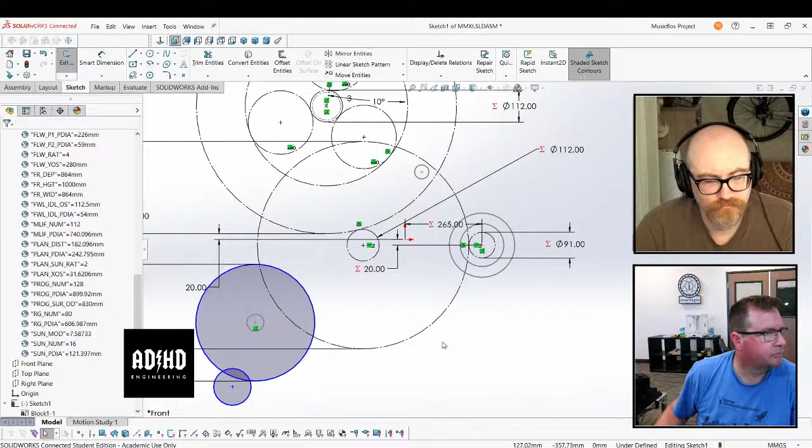Is a block just like a new origin? Blocks don't have origins, it's sort of hard to define exactly. They don't really in Fusion, but blocks are sketch entities.

Wow, what are you doing? I have no idea, yeah that's weird. Okay, I have no idea why I did that. Okay.

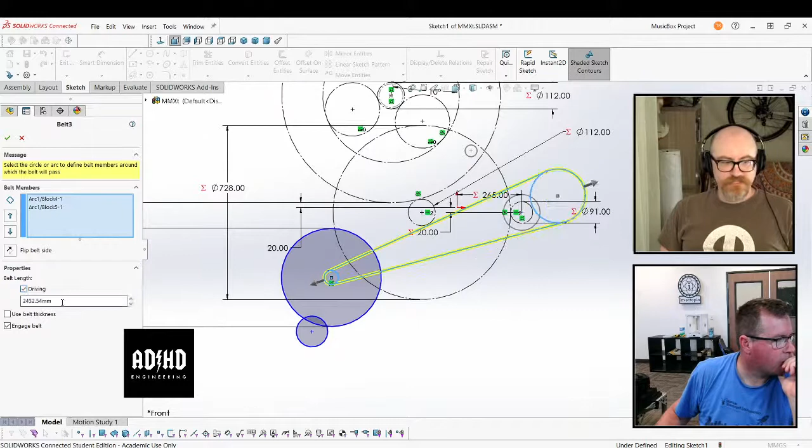Anyway, what was I getting at? So they don't have origins to themselves. They exist in a sketch, but they're sort of alongside a sketch, because if you look at the sketch, they're listed underneath it. And so they can be separately editable. They can be saved separate from the sketch. They can be brought up again and used somewhere else.

But another thing is they are required for certain functions, like the belt feature requires blocks. So you have to use blocks for that.

I think for a layout sketch they're important, because if you name them, once you're done with it, you've got a list of all the things you can add to it. Instead of block 1-1, you could say 16 T10 belt, 1800 millimeters, pulley 1, and now you know exactly what it is in the sketch instead of guesswork. You can also tell someone to edit it or bring it up. I think for layout sketches, blocks make a lot of sense.

It's hard to describe. They can't have their own locations, they can't have their own sketch relations. It's weird, they exist alongside sketch entities, but they're slightly different.

It's like a group. Yeah. Other programs call them groups, like Adobe products. That would be like a group of things.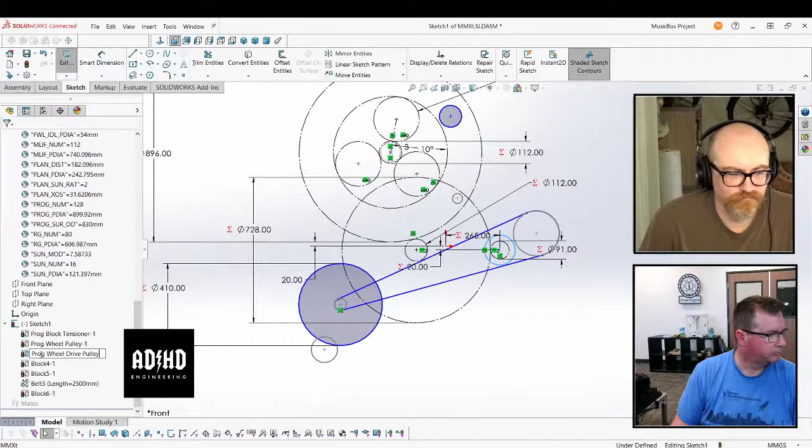In SolidWorks, not very many people use them, and the main use is what you're doing here with the belt features. But most people don't do a lot of 2D work in SolidWorks. They almost go right to 3D, so instead of having a block with pulleys, you just throw the pulleys in there and use other ways to figure out the same thing. But it's a very powerful tool.

So we're doing a layout at the top level. It's going to position everything, and then all the subsequent will fall in. So that's the only reason. This sketch is going to look almost identical to it, there's going to be a few other things in it.

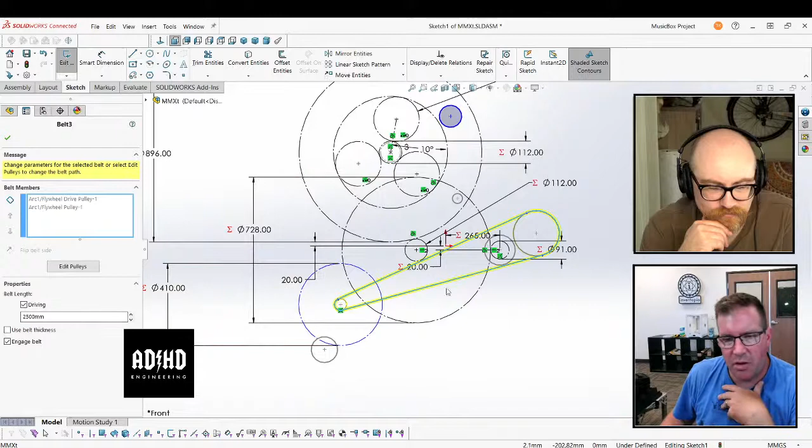On this belt here, we need to start wrapping it up. I gave it a driving dimension, 2500 millimeters, because this flywheel just gets tensioned by moving left and right in a slot, right? No, not at all. That's sort of, sure, but it's tensioned with an idler. It is. Damn it. Yeah.

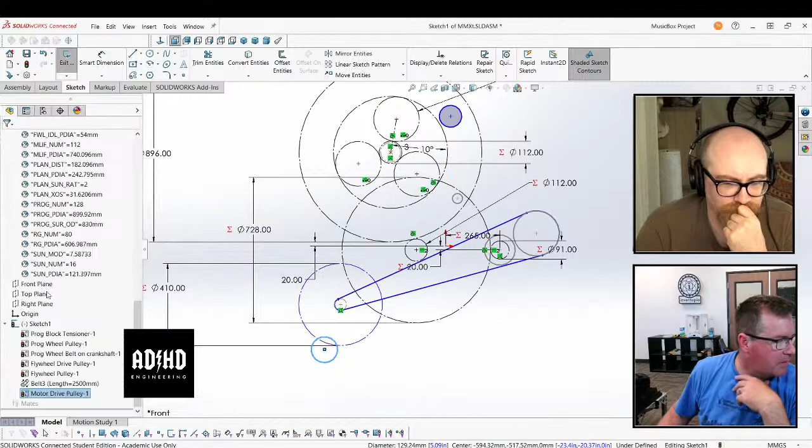Where's the idler? It's probably that thing on the bottom left. No, well, this is the motor drive pulley. I'll put that in, but I'm gonna delete that sketch now because it's now wrong.

So it's also got a vertical constraint to the compound gear. Oh really, so it's vertical to this? Yes, the flywheel is. And I believe there's an offset in equations from the origin for its height as well. Yeah, it's the flywheel Y offset.

It's right above, like 4 or 5 above where your mouse is now. Okay, and that's from the top of the frame? Yeah, I called it a Y offset, but it's from the origin, which happens to also be from the frame.

Sorry. You don't have to put in the quotes if you're calling up a global variable. I wasn't finding it. Oh, it's FLW, not FWL. Okay.

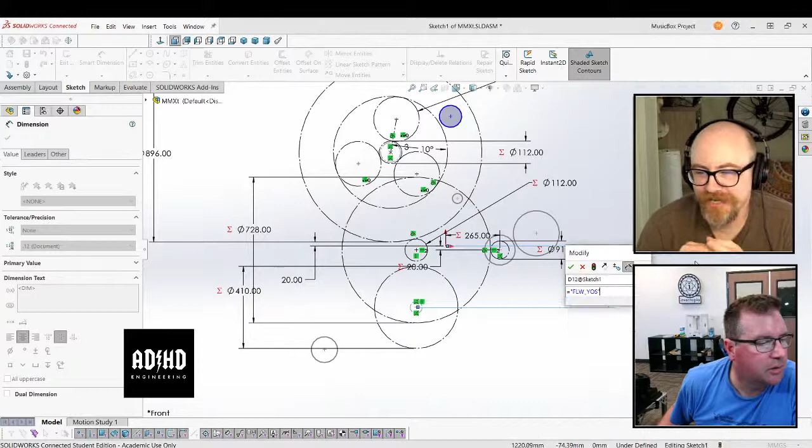All right, well, then there's an idler in there. Okay, that's fine. Now how about the motor? Well, we haven't constrained the motor at all, have we?

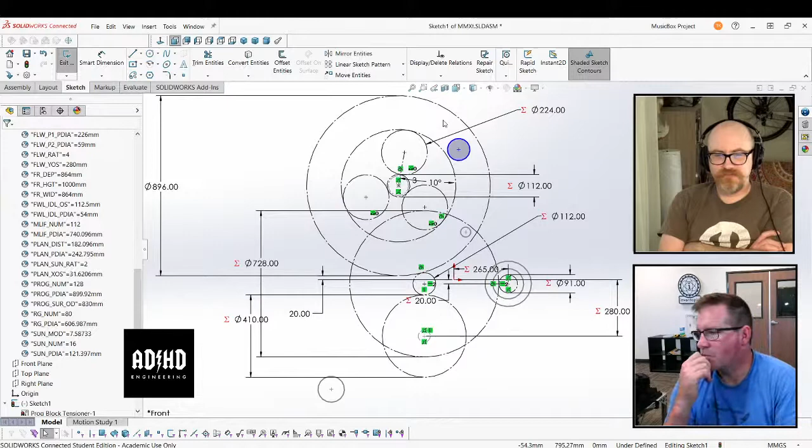No, in fact that's not going to be in your equations. I actually didn't include the motor for a lot of reasons, because first of all the motor was an add-on after the fact. The motor itself does not locate any other features, it just is a motor tacked on the side. So I don't think it really deserves to be in this upper level sketch, it's not a thing that drives other things. But like the DMAG pulley definitely does because it locates the DMAG. So, all right, well that should probably.

Let's do that. And then while I'm doing that, what's going to be next on this?

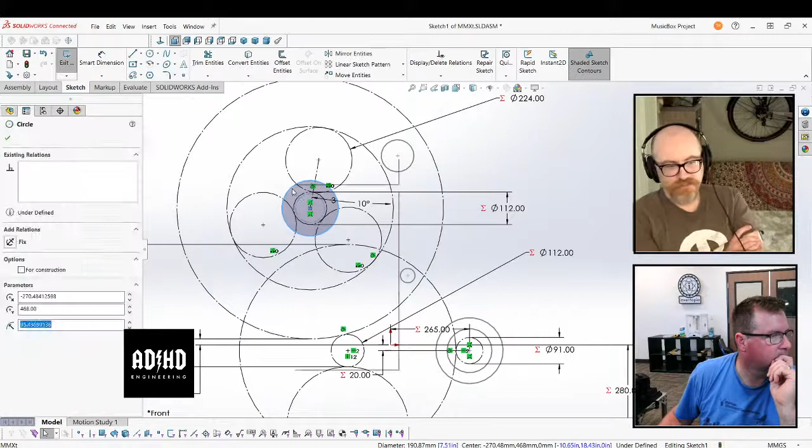That'll be a second sketch, because this one is specifically to block out all of the moving parts, the gear train. So you can put all of that stuff in another sketch. So you could almost call this a gear train layout. Well, that's exactly what it is. Okay, I didn't think that's what we were doing, but that's fine.

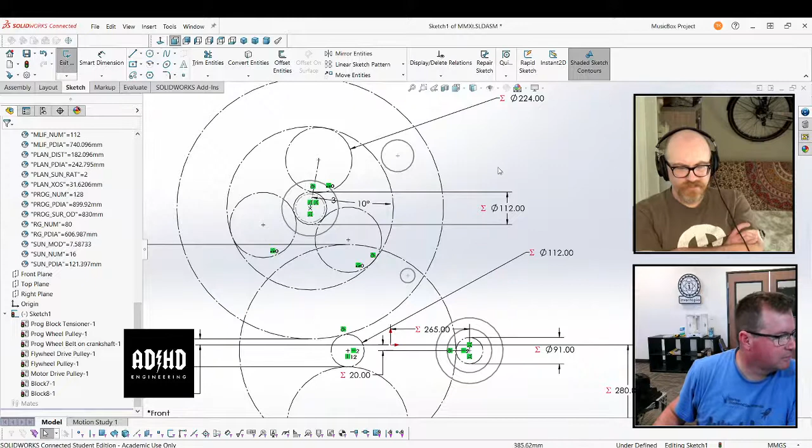You saw that I actually selected these correctly, right? So it looks like it wants to select a different block for some reason. I'm not really sure why. Are you selecting block 7 and block 8? I just stopped it, let me try it again.

I can't select it from the tree here, so selecting that one and this one. Okay, so it looks like you made some weird constraints. Do you have more than one instance of the same block? No, I made a unique block for each one.

Okay, so can you go back into the sketch itself, get out of the belt chain? And what are those coincident constraints in the middle? That's what's scaring me, I think it's...

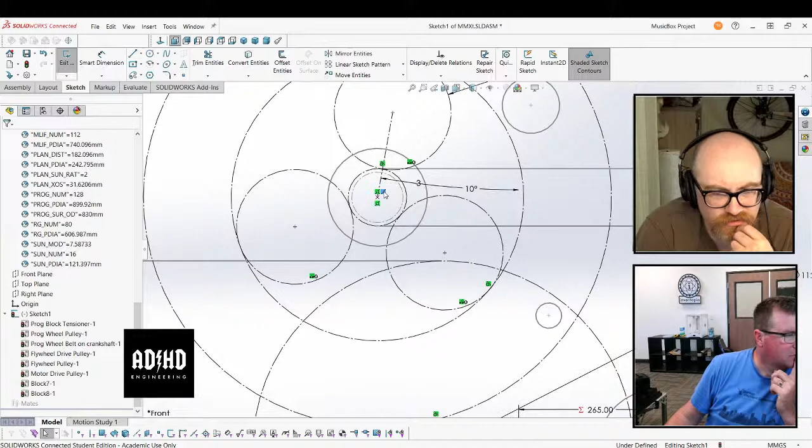This is why I generally use concentric constraints for circles, because the problem is that when you do coincident constraints with circles, you end up with weird issues like what we're doing right now, where you have no idea why it's doing this thing, when these things really shouldn't even be. I mean, they are actually, and I would be doing it a little differently, but either way, they're not really coincident so much as they are concentric to each other.

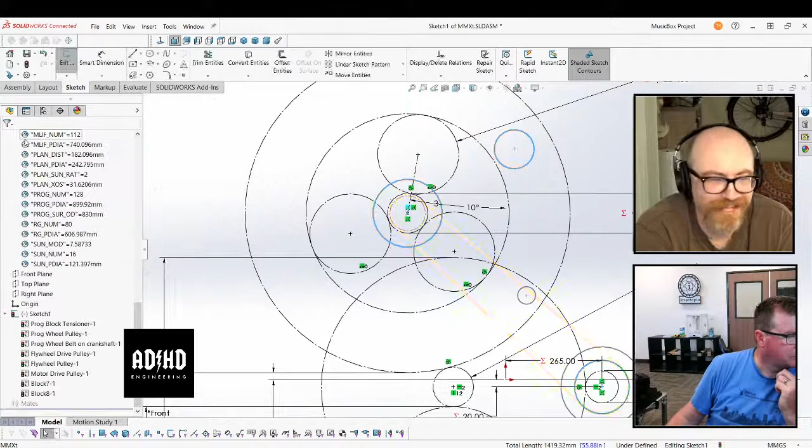The other thing you might consider is making this belt off to the side somewhere. That was then the next step. After dragging, he took away the coincident constraints at those locations at the end. Exactly. Move the pulleys out away from the geometry, get the belt to work the way you want it to, and then reconstrain. All right, let's try that.

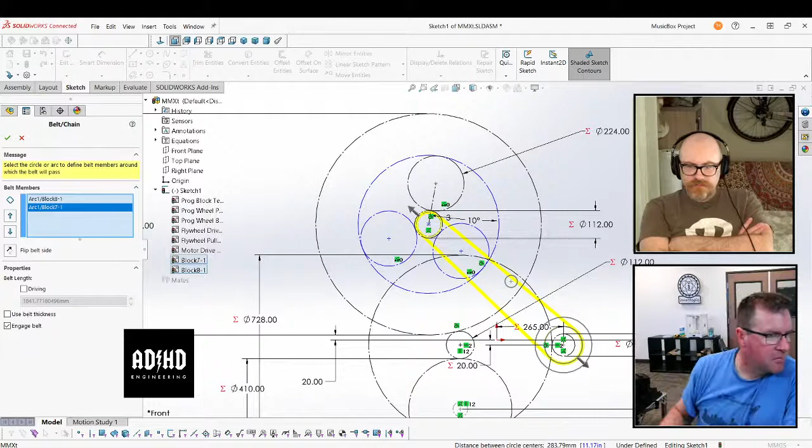What the hell? Fascinating. Amy, should I make a ticket? Yeah. Can it be that you want multiple copies of the sketch, of the blocks? No, right? No. What happens if you accept? Just hit okay, what does it do? Oh, let's try that. Yeah, it does it right there.

And the other weird thing is that I ended up deleting my first set of pulleys when I did all that too. We've got another person giving us some comments. Can you repeat yourself? That you need to exit the sketch maybe before you do it, or in which sketch are you?

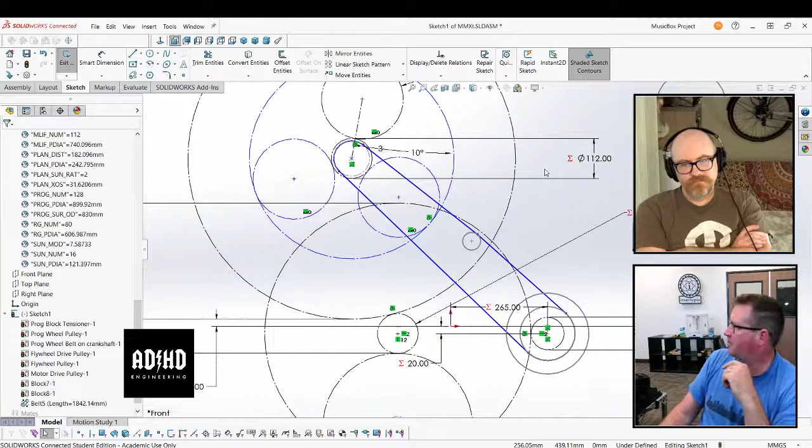Are you in the sketch of the block, or are you in the sketch of the sketch? We don't know, maybe. We're in the main sketch right now. Yeah, he's not in the block. Okay, he doesn't have the block open.